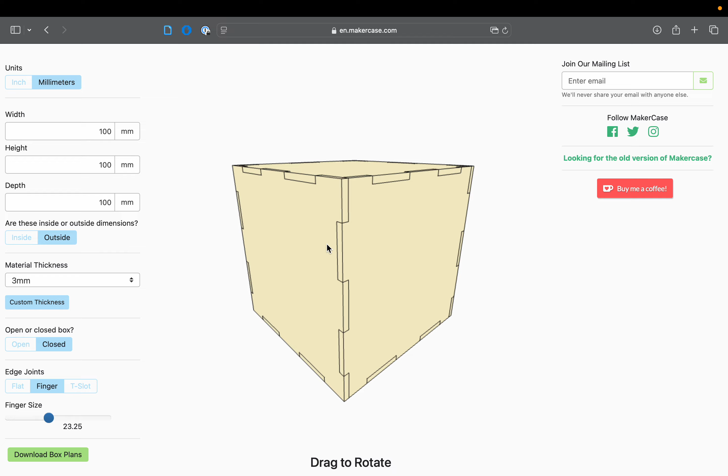A digital representation of a finger joint laser cut box set of plans. We're going to generate those with Makercase.com. This is a great tool that you can use to automatically generate boxes designed around the finger joint technique, and especially for laser cutting. In the end, it's going to look like this.

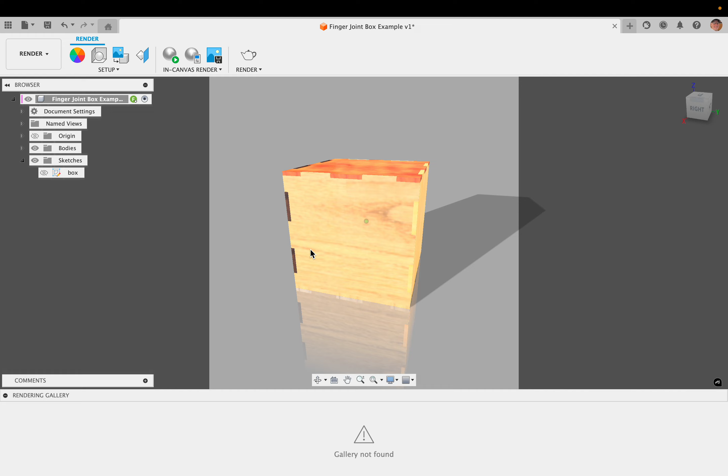We get 6 sides that are all equal, so it'll be a square box in our case, but you can make them almost any dimension. You can make them rectangular, and there are other generators that produce more complex shapes. We're going to start with just the basic shape here as you see it. I've colored each shape a different wood texture just so that we can see how it works and how it is held together.

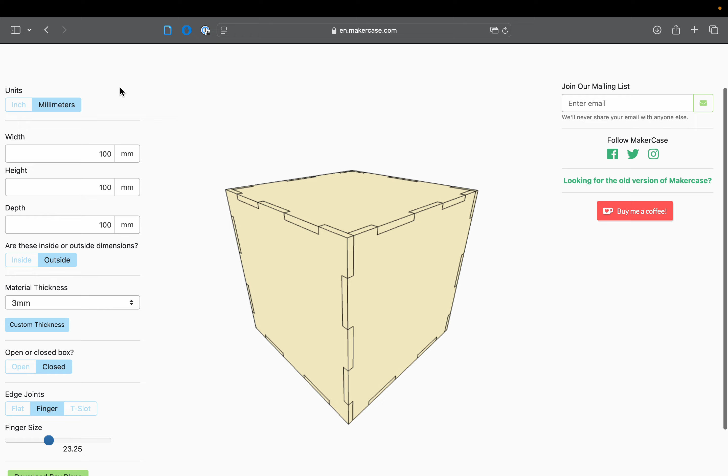Okay, first starting over at Makercase.com, I've selected the basic shape, and we're going to work in millimeters. The next step is to consider what our width, height, and depth needs to be. In my case, I'm going to measure this based on the outside of the material. If you have a desired size, for example, you're putting something in it and something in it has to fit, then you're going to look at an inside dimension and you're going to modify these numbers as needed.

The material thickness is the big deal for this type of technique. We need to think about how thick is the actual material and how much tolerance do we need between each piece in order for it to fit well, to compensate for any errors, and also to consider how much material is removed when the cutting operation happens. So this kerf, or the material that is removed for our laser, is going to be about 0.1 millimeters. But I also want to create some tolerance so that each part isn't painstakingly exact to put together.

So my standard material happens to be 2.8 millimeters, and then also the cut is 0.1 millimeters, but I want some tolerance, so I tend to round that over to 3 millimeters. And that will work well to be a nice good fit, a little bit of room for glue if I wanted it to be glued, but not too tight. Next, I'm deciding if it needs to be an open or closed box, and mine's closed at the moment, and I'm using the finger type of edge joining here.

The finger size is mainly an aesthetic one, although you don't want something completely tiny because it increases the complexity for putting it together. You can. Or something that is quite simple doesn't give us the best joint. So I would say just a couple fingers at a box that's 100 millimeters square is pretty good. So something like that or something like that. But if you prefer more, give it a shot.

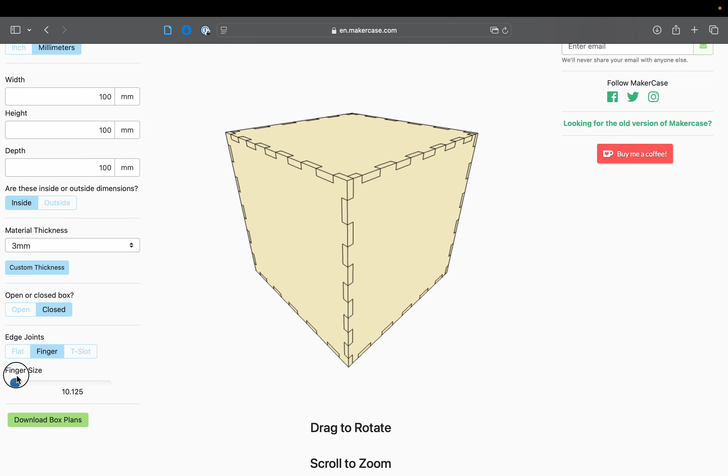Okay. So when I download those plans, I'm presented with a flat version of the box. These are the plans that we're going to use over in Fusion to recreate it. So we're going kind of backwards in this one. I actually don't need the labels to be imported into Fusion, which is the next step, so I've removed the labels. Otherwise, the defaults will be fine. I'm going to keep the panels separate, and I'm not going to account for any kerf or corner cutting compensation here, because I've already considered that when I entered my numbers.

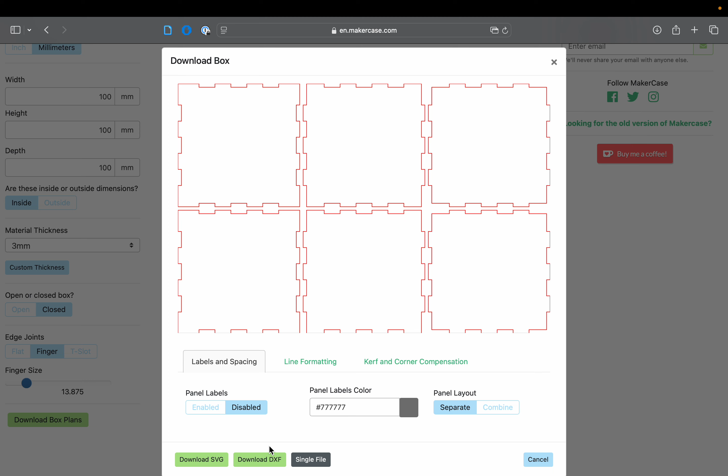I'm going to download it as a DXF file. This is a traditional file used for laser cutting, and I'm going to import that into Fusion. So after I click download to DXF, I'm going to note where it goes, whether it's my download folder, desktop, or wherever it's going for you. And then I'm actually going to turn the labels back on to use as a reference because it will help me out. The front face will be my reference face, onto which I'm going to attach the left, right, back, bottom, and top so that it makes sense. Doing this digitally really helps me understand how to do it in real life when it's cut.

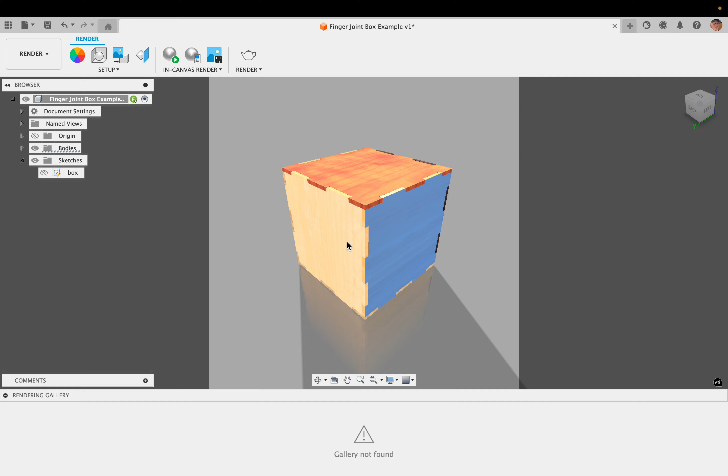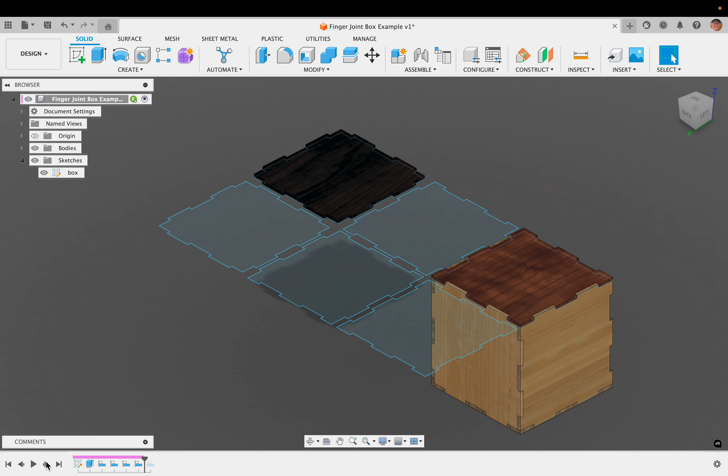Back over to my finished example, we'll go to the design, and I'm going to show you a quick preview of what it's going to look like. First, we'll get the DXF in as a sketch. Next, we'll extrude it based on a material thickness. Next, we're going to start assembling each piece like that. If I wanted to make aesthetic or other changes to each of these pieces, I can do it as a cube and reflatten it for manufacture, or I could do it here in this sketch. I can do it all kinds of ways. But since I'm not making modifications right now, this is where I'm going to start.

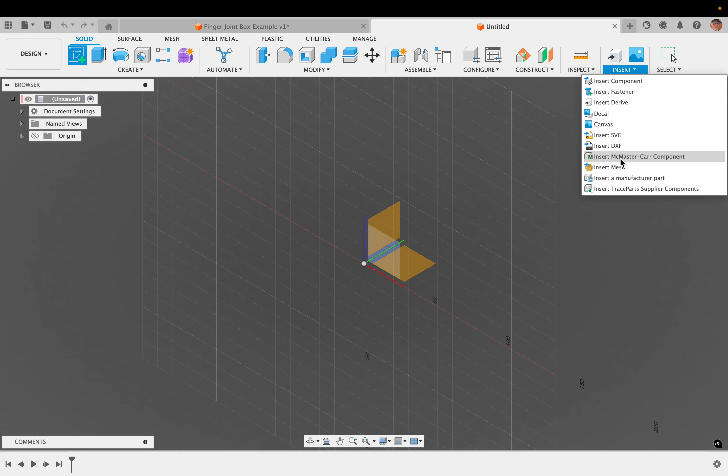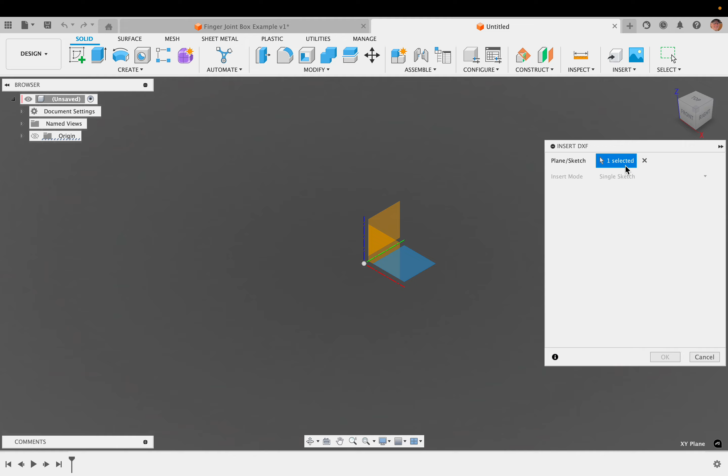Okay? Starting with a new design, with a new sketch, I'm going to insert a DXF. That DXF I'm going to insert on, in my case, the bottom plane. And I'll select that DXF file. Here I'm pointing to the one that I had previously downloaded. I'm going to insert from my computer over from the desktop. The box.dxf is my file because I had saved it on the desktop. Fusion will want me to just remind it where that plane goes. There we go. And here I get the labels as well.

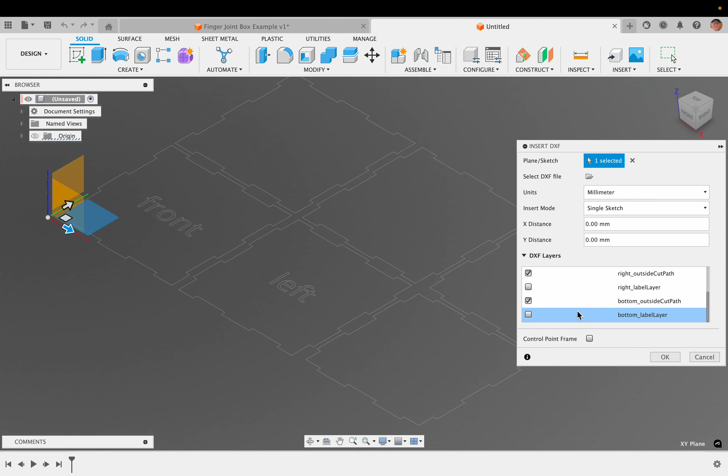Actually, in my version, I forgot to turn off the labels, and so I can really quickly do that by selecting which layers I wanted, or I could leave them and include them in the extrusion. But if you forget to turn them off, then go ahead and just turn them off layer by layer, and they are called the label layers. So each one of these that has label written in it, we can remove. Better for you that you just don't forget.

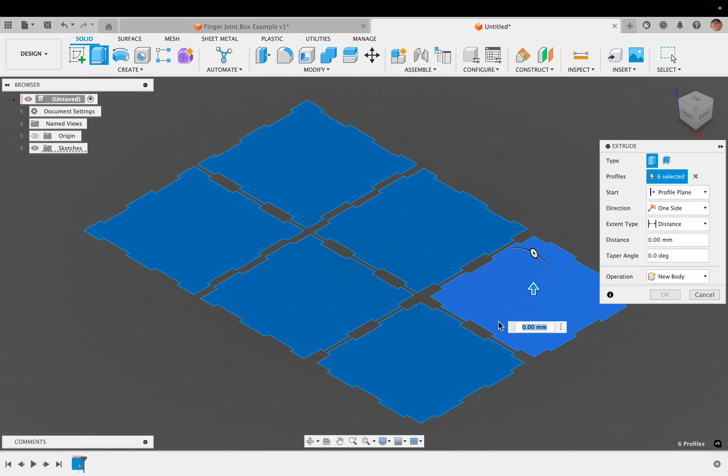Okay, so I've removed all of the labels because they'll just be in my way for my extrusion actions, and I'll hit OK. Now I need to extrude these, and I need to extrude them in the same amount that I set my material thickness to. In other words, they need to be the same amount as this line here. And this line, if I was to go and measure it, I would know that it's 3 millimeters, and so that's what I'm going to extrude here for.

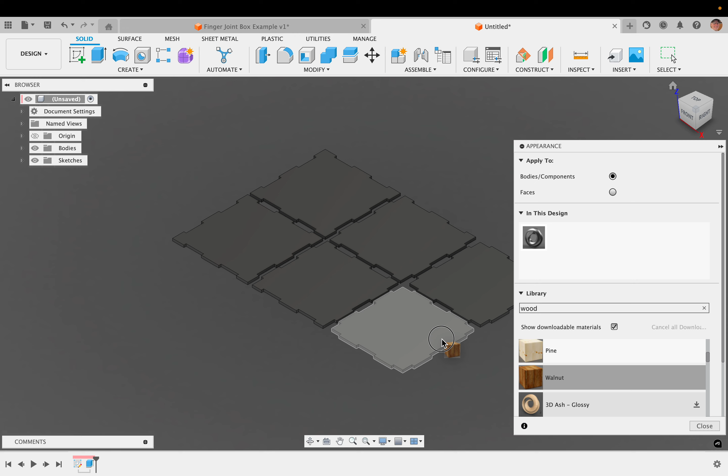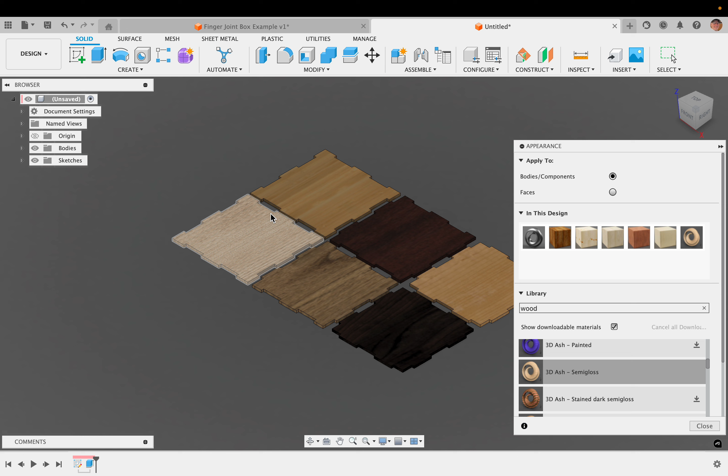At this stage, it's helpful to apply a material to each of these. You can apply random materials. Here I'll search for wood, and I'll apply a different material to each face just to give me some sense of where things are in space in relation to each other, because working with nearly identical gray parts just isn't that easy or fun. Okay, so I've got 6 almost distinct looking faces that I can assemble.

The next part is a fun part, which is putting together these pieces digitally. I know that this bottom left corner is my front piece, and if I look over at the reference diagram, I know that that's where the front one goes. I'm going to attach the front one to the left one, because I'm going to work on the front one as the reference. So if this part is supposed to be on the left of the front, then this tab needs to go onto this corner here. Fusion gives us a tool for that called Align.

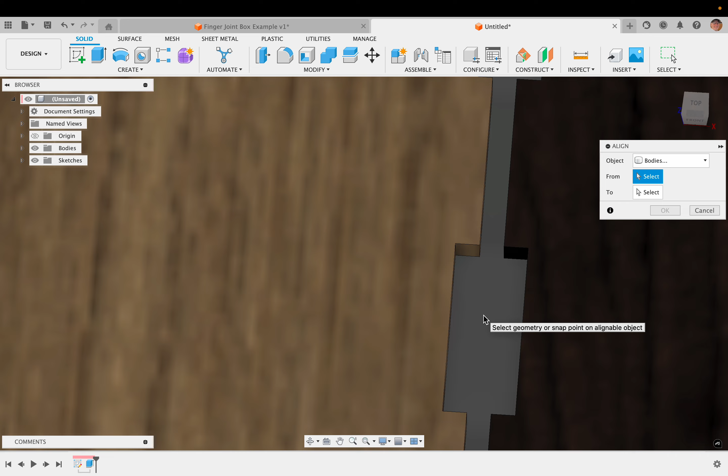And I can align a joint origin produced from the center of a face, so this face, not just the face though, not here, not like that, specifically the origin there. And I'm going to bring that to its matching face, which is on the other side of this tab here. So there's going to be some camera rotations. This is why we colored them differently, so that we can keep track of where we are. And I need to go very specifically here, okay?

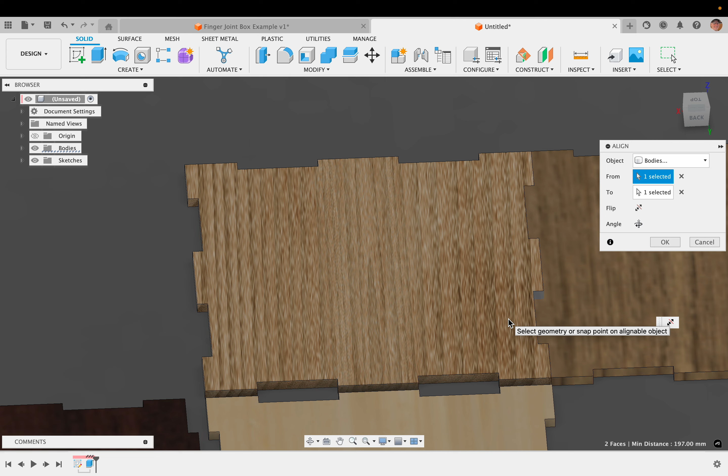And because this face is the front face, I'm going to use the angle button here to just rotate through an angle, keeping this front from my default view so that I can keep track of where I'm at. Okay. Next is the right panel. I know that that's the right panel because it's in the top center. And again, I'm going to use the Align tool.

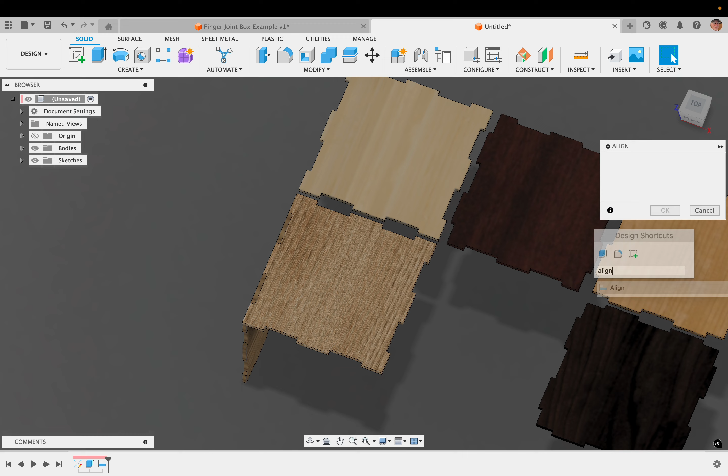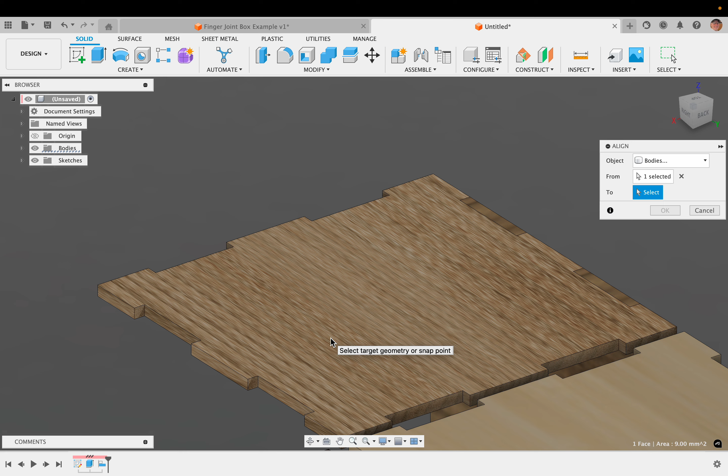I'm going to select a face that I can use to connect to the other one. And in this case, because I'm going to target this area, really I should think about using this side of the panel. And so I will use this face here. And then thinking about where that goes here. So it's like digital puzzle building. And then I'll angle that at the correct angle. While I'm doing this, I'm watching that I'm not making anything interfere, that is to say overlap with each other, because all of these pieces should go together completely correctly.

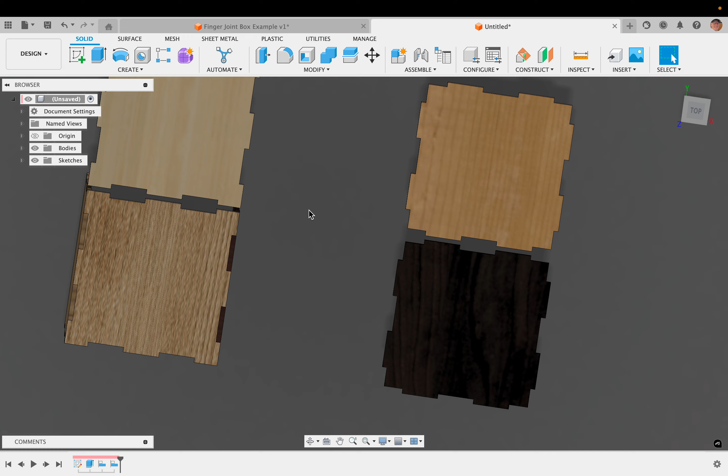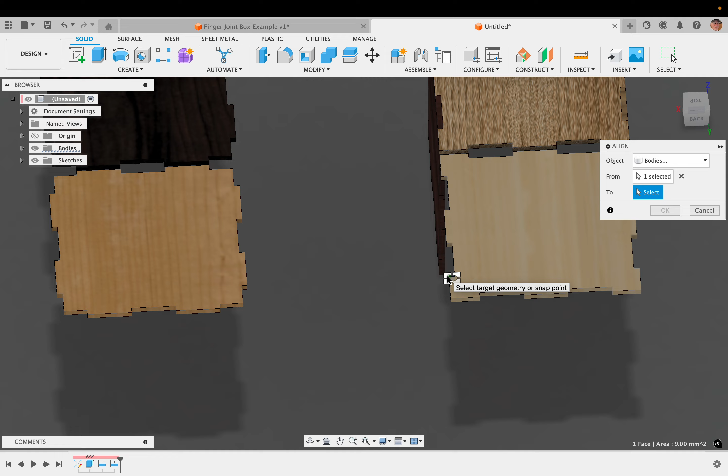Now I'll look at the back face, that's the top left face. And the back face is going to be aligned. There we go. And I'm going to put it back here. So in order to do that, I just have to choose really almost any of these, but I will align this interface with its mate over here. Now it's a good idea if you sort of plan where this is going to go just before you start moving around a lot, because it's very easy to lose track of your orientation in 3D space.

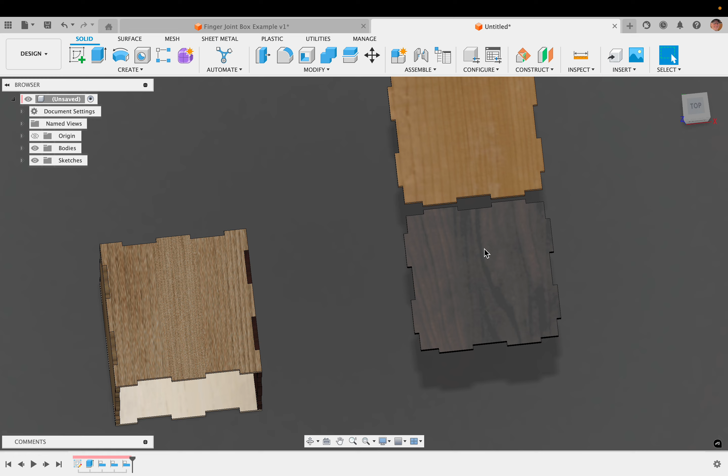2 more to go. We've got the top and the bottom that were on the right side, on the lower and upper row, top and bottom. So this is the top. So I'll take that top, find my face, and create that alignment. There we go.

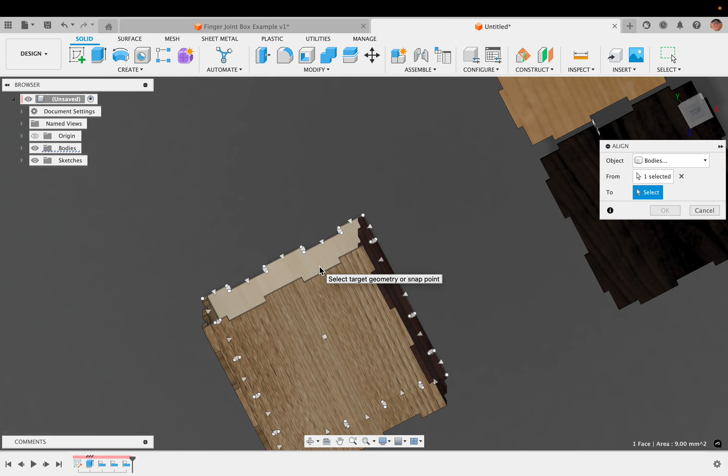Now, the Align tool is just one tool that we could have used for this. We could have used a Move tool; that would have been very inefficient and very difficult to get these pieces moved into space, because Move would have required us to translate it by distances. But another tool that could have worked would have been the Joint tool, and we could have created rigid joints or connections between each of these pieces. The Align tool, I think, is just perfect for what we want, though.

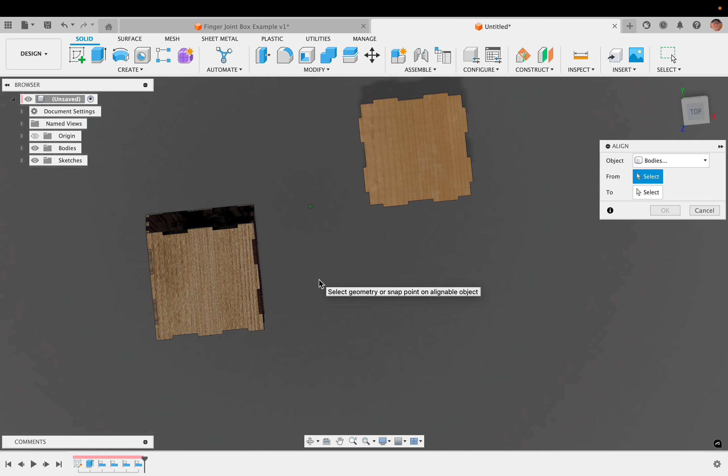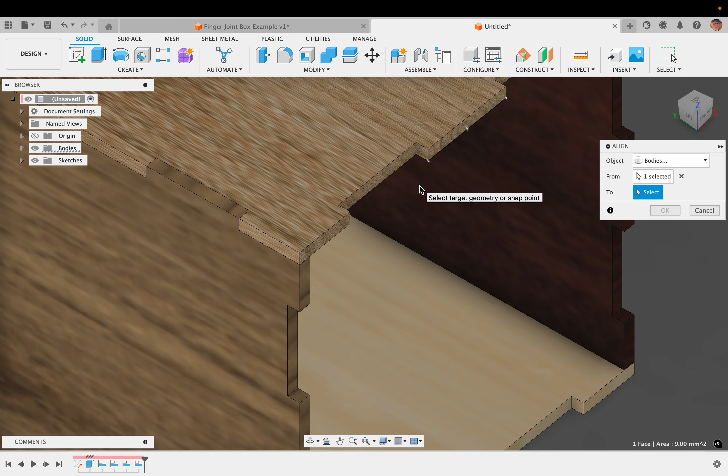And the last piece, I'm going to bring this face, and I need to look at that face and say, okay, it's over here. That must mean it goes here. Change its angle. Okay. So there I have it. The pieces all perfectly intersect with each other, and all of the corners are logical and make sense, and they're not overlapping.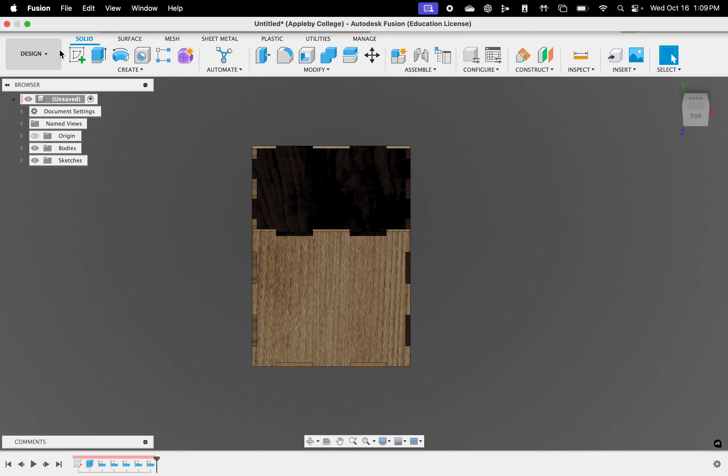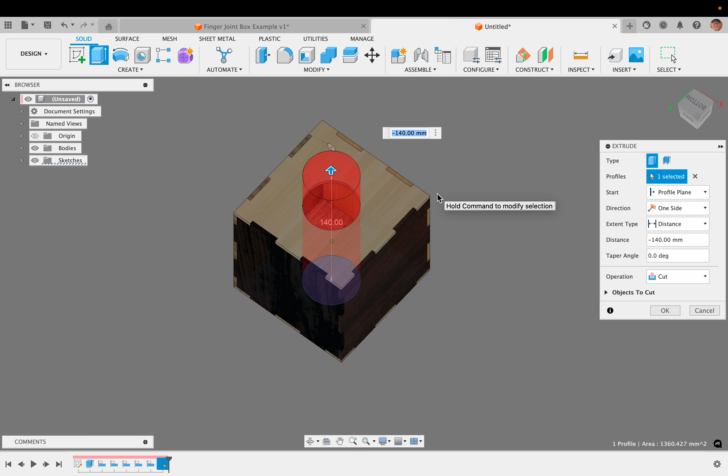Now, some fun things you can do from here are you can play with how the faces actually look by creating sketches onto the faces after the box is built. You could have also done that before. But if I create a sketch, let's say, on this face, I can create a circle here, and if I extrude this circle, I can modify that other face. And what will happen is when I go to manufacture this, both of these parts will be exactly lined up.

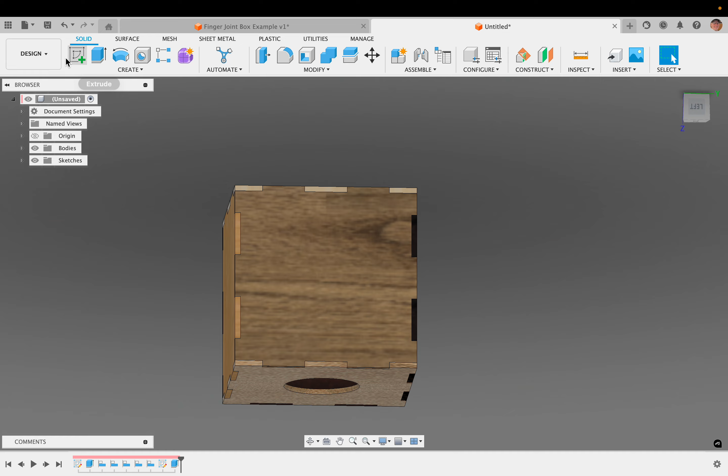I can even make this hole larger by creating a taper angle on the extrusion, but it is still lined up with that hole. So it's a good way to make a box design where it makes sense in Fusion and the modifications are aligned. There we go. So we'll end it off with the rendered version of it. It's got a hole on the top and a larger hole in the bottom. Okay, hope that's helpful.